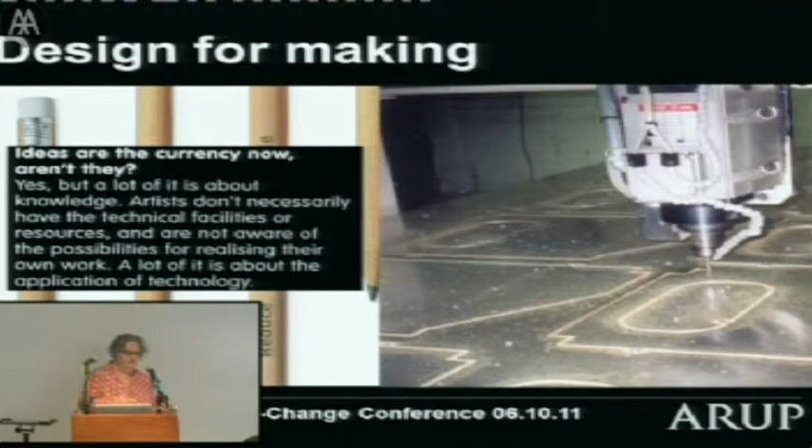The thing that is also happening very clearly is that the models, the tools, are coming from the manufacturing industries, often of airplanes. So they have some effect on what we design, on the type of building. This whole generation of weird shapes and weird surfaces is largely coming from these tools. These tools were made to do those weird shapes for airplanes. And they've been borrowed and appropriated by architects and turned into their own tools, but I think the tools have an influence on what is actually happening in terms of design.

And you may wish to sometimes challenge what the tool is doing in order to retain or regain some of your design freedom or your design abilities. But that doesn't mean they're mutually exclusive. Those tools are fantastic for more regular buildings too, and that's possibly where you capitalize most on their benefits. We're using those tools to do our most complicated projects very often, but we should be using them for all our projects, and that's certainly something we are striving for.

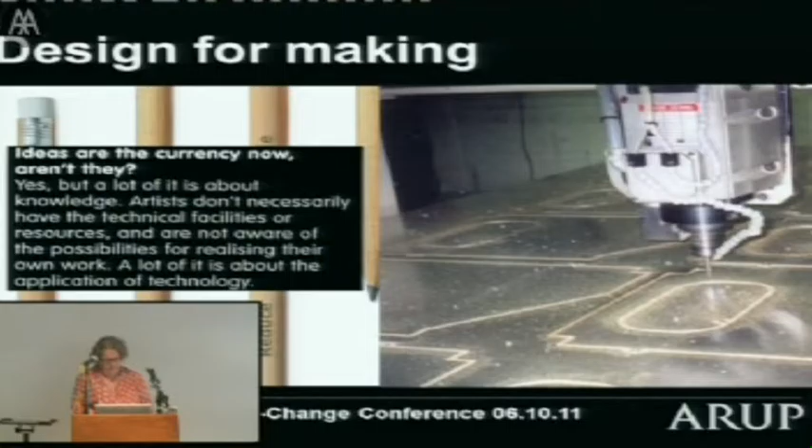Making is something which is currently very much in the air. There's a new course or new courses being created with Design and Make in Hooke Park. There is a fantastic exhibition at the V&A called the Power of Making right now, which is going from crafts to full digital prototyping methods and how the two can actually enrich each other. So it's something which is really very much of the time.

And I thought I'd just show you a few photos of what making might mean for the construction industry. This is actually a set of fabrication photos of the Millennium Bridge in London. And you see the whole range from the cables to the concrete to the pile to the formwork, the erection, and the very, very clean little picture in that corner is the manufacturing of the bearings, which, when we visited them for the testing, were on a white linen table and had been dismantled.

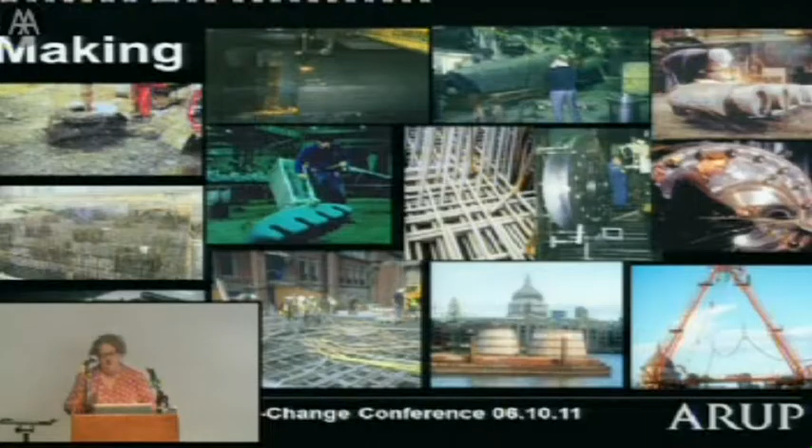So you go from these almost 19th century spaces where people are hammering metals and doing absolutely nightmarish jobs up to a point, into these sometimes very immaculate, delicate places where more elaborate or more technologically complex items are being fabricated. So that's all the sort of things we play with.

And in a way, when you look at projects from that angle, you may not necessarily recognize them. These 4 pictures are 4 extremely well-known architectural pieces of work. I'm going to show them to you in a second, but that's possibly where we come in as engineers, being able to transform some sort of image or idea into something that actually can be made. And there is no reason it has to be the engineers that are actually doing that task.

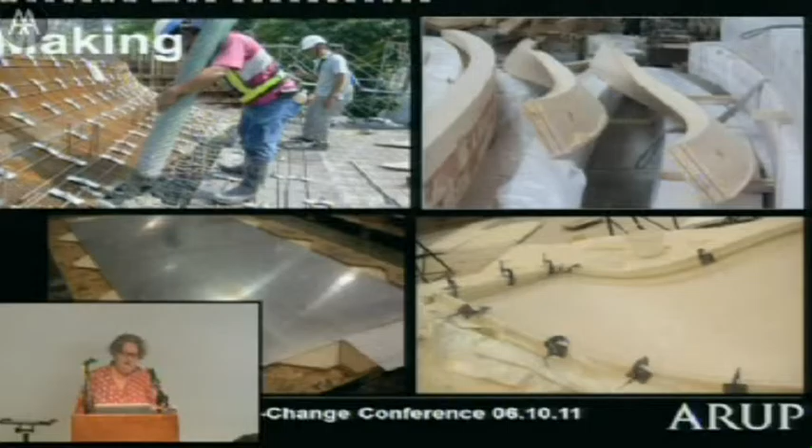There's absolutely no reason for that, except a historical split between architects and engineers, and also maybe a curiosity for making things, which goes with being an engineer, that is maybe slightly different from the one of an architect. But I take real heart in seeing the presentations this morning and all the schools actually teaching about making things and making big models, prototypes. So I think some things are also changing, and probably for the best in that respect.

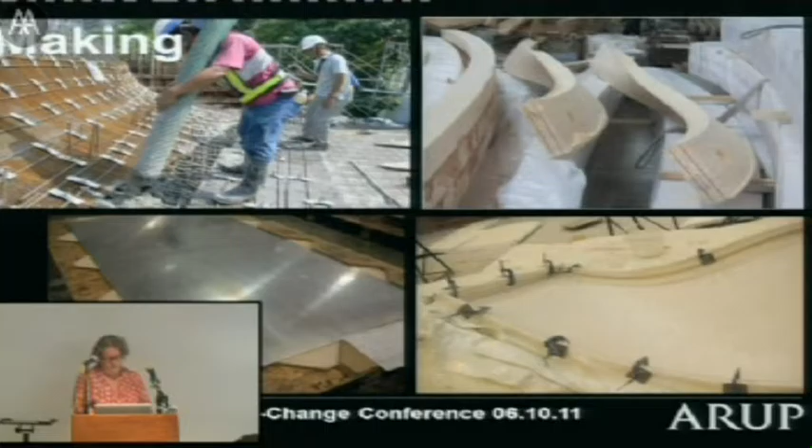So I've chosen a few projects: Toyo Ito's Taichung, the Centre Pompidou Metz, the Serpentine Gallery, and the Chanel Pavilion, which are projects which are either all finished or, in the case of Taichung, in the process of being built. I've chosen them because they all have geometry issues, they all have digital geometry and fabrication issues, and they also bridge the gap to the more analog aspects of the fabrication.

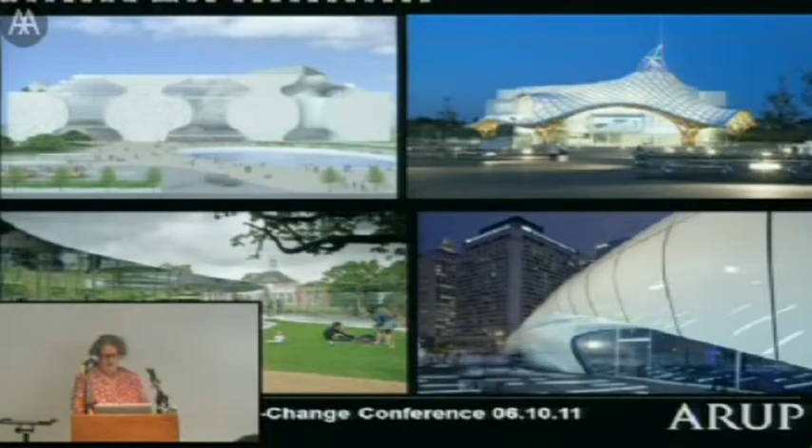Ultimately, it's still going to be people with hands and tools making those things up to a point. There will be digital tools, there will be manual tools, but there's still a very analog part of making things in the construction industry. So just to go a bit more in detail, I've chosen 2 projects for materials. As I thought that steel was the one that had gone the furthest into developing the relationships, I chose the other 2 for the other 2 main materials of the structure world.

So Taichung Opera House, this is the model of the main part of the structure. So this is actually the structural part, and it's concrete. Shown at this size, you don't have any idea what I'm showing to you. It could be that big, or it could be that big, which is actually sometimes a problem of these digital tools, because they make everything possible, and then suddenly you realize that when you cut it into manageable size, it's actually absolutely ginormous. But this is a relatively large building.

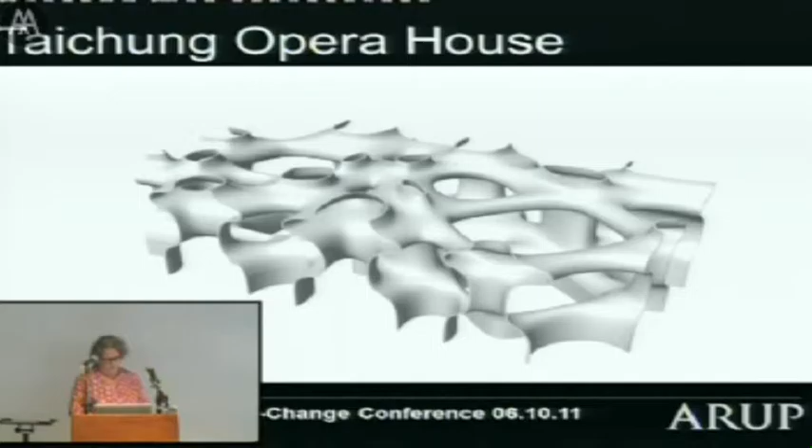And in a way, what has happened there is that we haven't just designed for making, we've actually learned by making and informed the design, which is relatively rare, actually. It's relatively rare that we're able to mock up parts of building, and in this case, actually increasingly large parts of the building, in order to develop the methodologies that will feed into the design.

This is going to be built with sprayed concrete technology. It's something we've been using for other types of projects. We've used it in the UK for a couple of projects. The first one was the Birmingham, by Future Systems, the Birmingham shopping centre, and that was just for a facade. Then we moved on with the Darwin Centre, where the egg shape inside the Darwin Centre is also a sprayed concrete structure, but this time it is part of the main structure. I think Taichung will be really way ahead of most of these in pushing that technology.

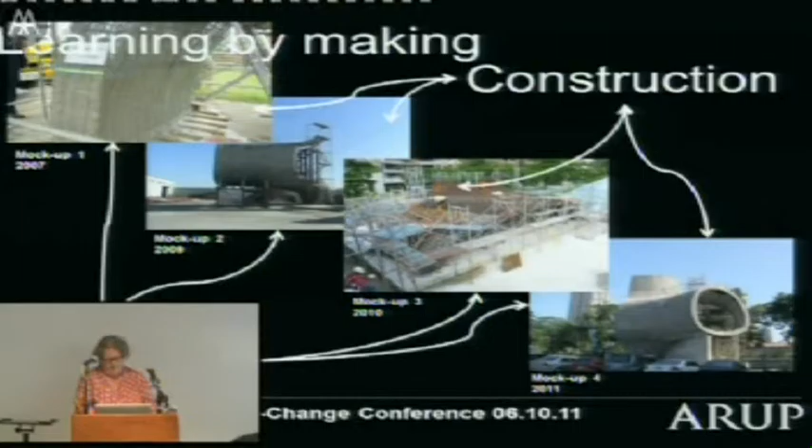So several mock-ups. You can see we started designing Taichung probably 4 or 5 years ago, and the mock-ups have followed on. We're at the 4th mock-up on this one. Same sort of questions that Wolf has raised. Issues of exchange of data, issues of rationalization, issues of parametric changes, how you deal with all this.

But I think it is still fair to say that despite the abilities of technology and despite the abilities of contractors and fabricators to fabricate more and more bespoke things, there is still a great deal to say for some amount of repetition in the fabrication process. And that's something most people don't really want to hear, especially in architecture schools, but I really believe that there is a need for some repetition in terms of economy of projects. There's still some of that.

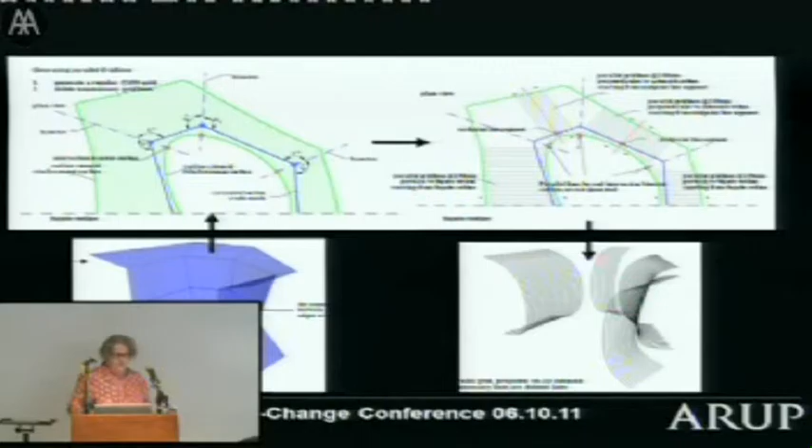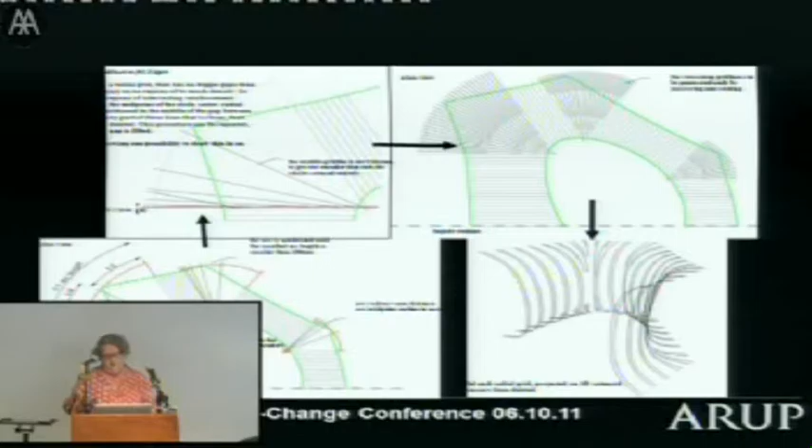So what we did is we modeled the catenaries with some driving lines, basically, some parametric lines. And we decided to create the rebar cages in parallel sections for at least a good part of those catenaries, which is the ones that you see here. And then infilled in radial parts the corners in between those elements. So you had a mixture of very parallel elements and radial. That, of course, ended up translated in a series of drawings for the rebar elements.

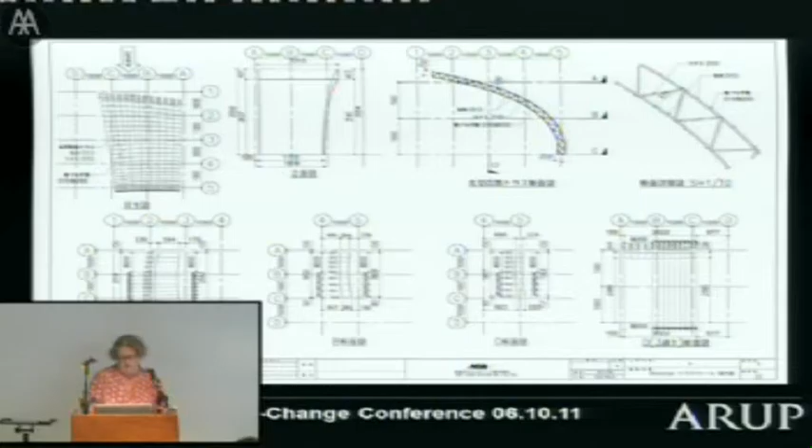And there I should add that we derived the geometric principle for that project, but we didn't do the whole exercise on every single catenary. A local Taiwanese company, probably more like our friends who are the next speakers, produced the drawings for every single one of the elements. And that's the thing that happens, it creates a need for a large handling of data. It could have been done by us, but in that instance it worked best with a Taiwanese company coming into the picture.

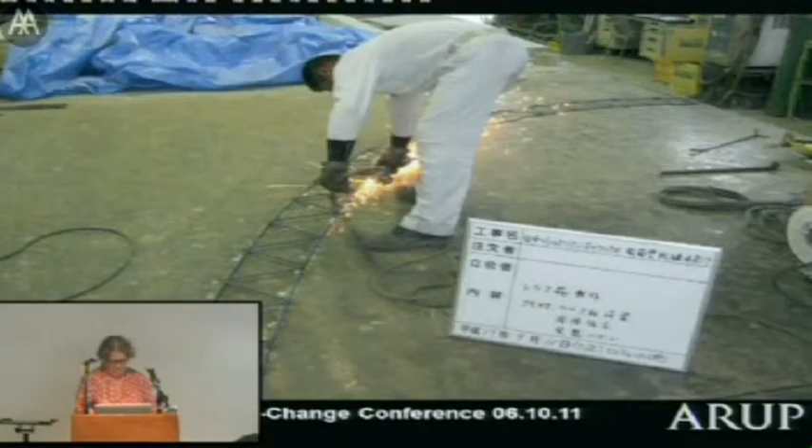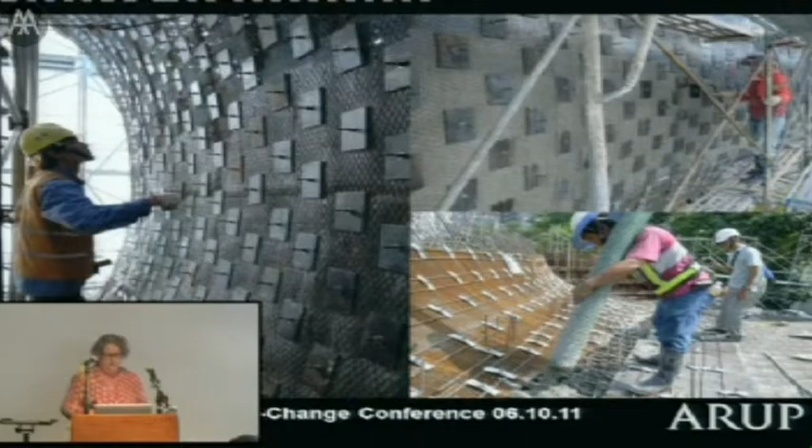And then it ends up quite analog. This is the early mock-up, so I think they did it slightly differently later on, but that's the early mock-ups. And then they assemble the different elements, install them on site, put the mesh that surrounds the cage and will hold the concrete in place, and you are left with this, which is the final mock-up, the more recent mock-up. And you might think, my God, this looks absolutely terrible. But I look at it and I think it's an absolutely fantastic achievement.

The fact that it's mottled is irrelevant because there will be a finish. The structure is not entirely visible, or at least its surface is not entirely visible, because actually its geometry is extremely pregnant into the building. But you can really learn, and we learn every step of the way.

Every single one of these mock-ups fed back into the loop of the tools which were used and the tools which were developed to generate the next bit of the design and into the analysis. So it was really having some preliminary ideas, testing them with a mock-up, coming back to the design, and so on, for at least 3 or 4 times for this project to be able to happen.

The project is currently on site, but the catenary in their full fabrication haven't yet started, but they will be quite soon. The rebars are being installed for the ground floor.

Quite a different example is the Pompidou Metz. In a way, the technological abilities of the parties were quite different in the case of the Centre Pompidou. And it's quite interesting that the method of work of Shigeru Ban is by making design models. He likes to make models. If you ask him to do anything digitally, it's going to be quite painful. That's not his style. At least that was not his style when we did this.

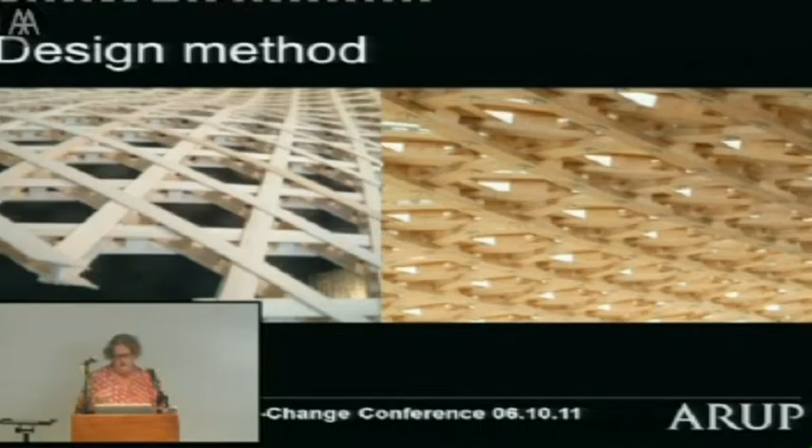He may have developed it since and maybe has changed his views, but his models, these fabricated models in the workshops, were generally more accurate than the drawings. If something was on the model, it was in the project, but it may not be on the drawings. So he did a number of models of this mesh of the timber roof of Metz. But as you can see, all we got from him in terms of geometry was the chicken wire model that you have here.

And I've been asked the question, would you have liked him to give you more geometry? And I think that's a really interesting debate, because to an extent, being able to do the geometry yourself means that you are able to make sure it is as smooth as it needs to be, as continuous as it needs to be, that it serves your purpose, as well as actually serving the architecture.

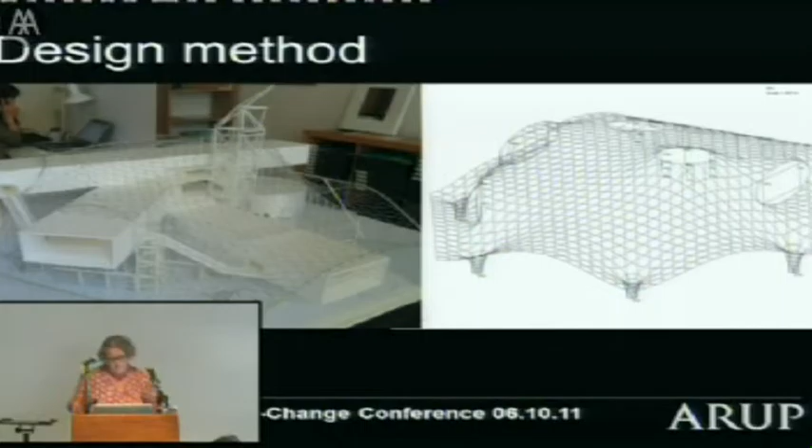So I'm actually not completely sure that giving the geometry or getting it entirely from the architect is necessarily the right thing. I think the exchange between the two is quite important. And then we developed the geometry, and we did it.

Form finding is an engineering technique to create membrane structures, developed a while back. It's not a geometry tool in any way, but at the time, the geometry tools were certainly less developed than they are now, and we used the form finding to generate the geometry of the mesh that is forming the roof. We were asked by Shigeru to send him 2D elevations along the 6 main directions of the building for him to look at the geometry.

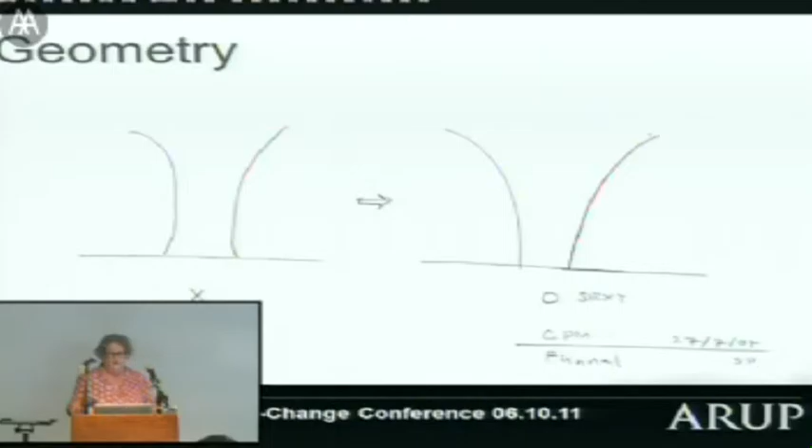And we would receive these sorts of instructions from him to move the model to the next level. As you can imagine, it took a little bit of time to get from a sketch like this to a finalized geometry with Shigeru. This is of course slightly amusing, but it's not a criticism in any way. It's actually a way that we worked through this, and that's the way he was comfortable working.

I will pass in one slide over probably about 18 months of very, very complicated structural design on this project. But the thing I wanted to show you is that ultimately, in order to look at the results, we would almost reproject the results onto the shape so that we could understand how many of the elements were working. The little bits of red don't work yet on this image, and will require further looks and further special cases.

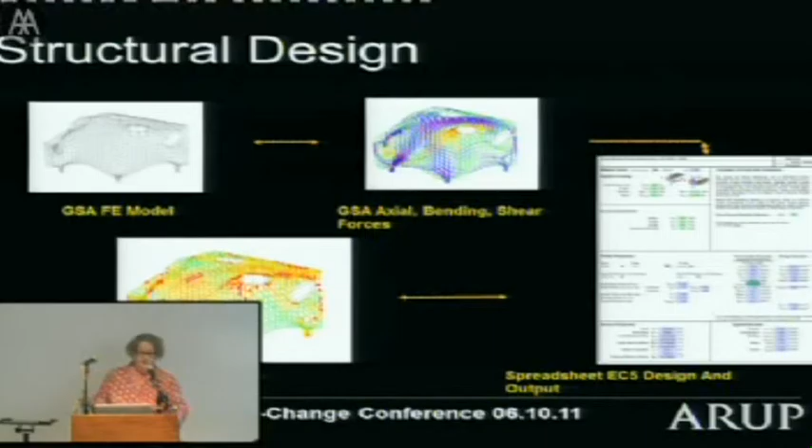So sometimes with these kinds of large and complex geometry and large numbers of elements, you almost need to do it back visually to assess where you are in terms of your design. It's almost impossible to look at it in a table of results. Of course, making that one is a particular challenge. Every single piece is different. And I think one of the next speakers knows even more than I do about that.

Every single one, so it's a complete opposite of what I said earlier. There's been no rationalization, no attempt at repetition. Every single element, even in the build-up of the sections, where there's 2 layers, are different because they're related to the main surface. It's twisted and turning in all directions, and it has to be made, and then brought to site and assembled.

There were more or less 2 ways of making those pieces, one of which has been shown to you by one of the previous speakers: lamination. You create a form, then you lay your laminates, clamp and glue, and create a laminate which is actually shaped. Doing this at the scale of a 100 by 100 meter roof with that many elements was completely impossible economically. It would have totally killed the project, which didn't have such a huge budget for something like this.

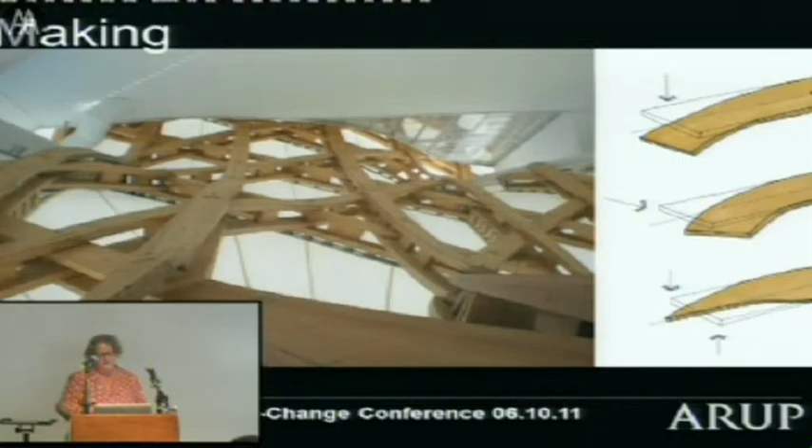The other idea was that you would fabricate a piece of laminated timber, a normal straight one, and then you would CNC the shapes inside that block. The problem with that is that what is important in timber design is the grain of the wood. By doing this, you're potentially cutting the grain across or putting it at an angle to the main flow of forces, which is a bad idea because you lose a lot of strength quite rapidly.

So the job that will probably be described in a moment by the next speaker was to find a way of optimizing the lengths of elements and the way they were cut inside the blocks such that the grain was never more than 3 or 5 degrees from the main direction of the plank. That is quite a task mathematically, and that's where the team came in. It was commissioned by the contractor to do this optimization for them.

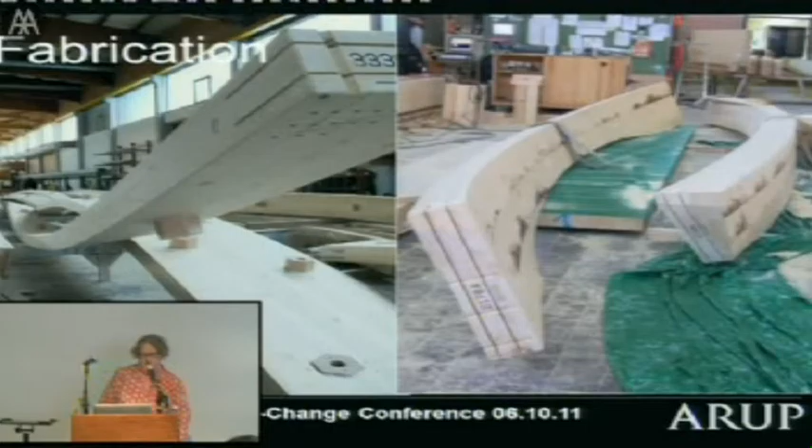So not only were all the elements different geometries, but they were also different lengths, because when the grain was becoming too far from the 5 degrees, you had to crop the element and start again. So quite a bit of optimization of the pieces, but then you ended up with a very large number of spaghetti elements with a referencing system that would have to be assembled on site. Ultimately, you end up with probably one of the most complex things I've ever worked on, but an absolutely fantastic roof.

But as you see, the digital proportion of it was quite different between the different parties, and there is room for maneuver between these examples. I think that's where we are more or less at the moment. We're doing these complex geometries, complex structures with these tools. The tools are changing all the time. Nobody had heard of Grasshopper probably 2 years ago, except in some very small confidential distribution. Now it's almost one of our daily tools. This goalpost is moving all the time, and I think the relationships are changing.

They are changing, and at the moment they enable a discussion at each project about who's doing what. In a way, it's not a bad discussion to have. I don't think you'll decide to always have the same model for all projects. You can choose between the models that Wolf has shown us for the different projects, and it will depend. It might be one for one part of the project and another for another part. But at least this discussion is now happening at various levels and is really helping the process. We used to think we knew what we were doing. Now we have to talk a bit more about who's doing what and how we're going to do things. That's it.

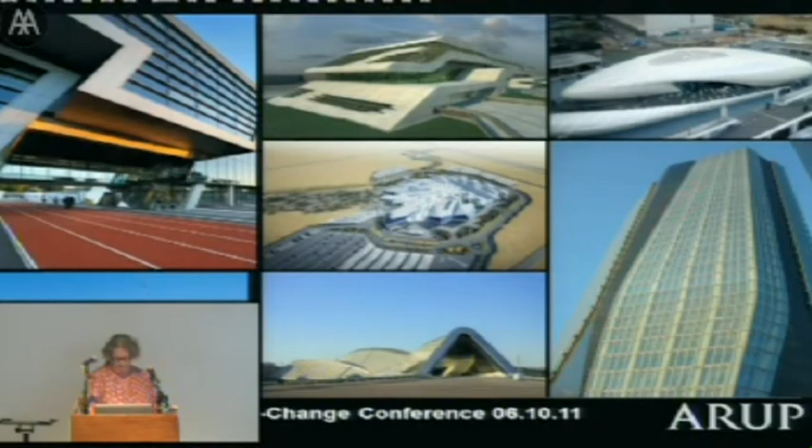Thanks, Sophie, for your fantastic talk. I'd like to now introduce Fabian Scheurer, who will probably, as Sophie said, pick up. Is he first? You sure? I'm fine talking. Okay, let's go with you. No harm.

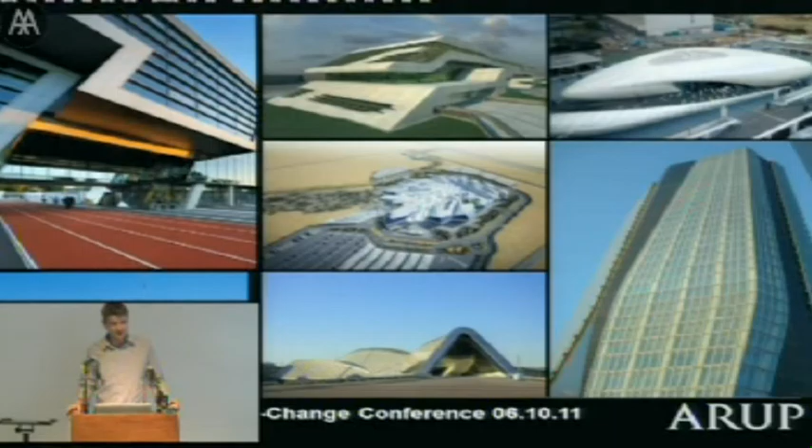Fabian is the founding partner of Design to Production and leads the company's office in Zurich. After graduating from the Technical University of Munich with a degree in computer science and architecture, he worked as an assistant for the university's computer-aided architectural design group.